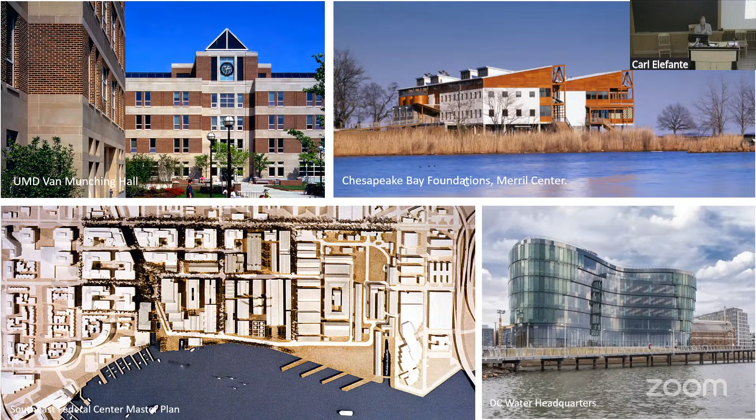And then Tom Eichbaum. He was one of the first graduates, I think in the first class of the University of Maryland School of Architecture, graduating in 1974. He then went on to get his master's degree at Harvard, but always his heart and the base of his architecture career was in Washington, D.C. He returned shortly after and became a partner in KCF with Tom in the mid 70s.

One of the things that most people who knew him well may know about Tom was that he was a really active model maker. He believed a lot in the physical qualities of a model and how important that was. That was a legacy he inherited from his father, who was the chief model maker for Louis Kahn. So he grew up learning a lot about great design and great modern architecture directly from one of the greats in Philadelphia.

Some of the projects he was well known for and very proud of was the University of Maryland Van Munching Hall. He was among the first trained architects from the University of Maryland who designed and built a building on campus. He was also very ahead of his time in sustainability and thinking about conservation and the environment.

He was instrumental in delivering the Chesapeake Bay Foundation Merrill Center, which was one of the first LEED Platinum buildings in the world. An example of the model here on the bottom is the Southeast Federal Center, which was instrumental in reshaping this southeast quadrant of Washington, D.C.

Now if you go down there, this is where Nationals Park is. A lot of great development that you've seen over the last 10, 15, 20 years was really tied back to this master plan that Tom was instrumentally involved in, which translated directly for Smith Group into one of our great projects that we're very proud of.

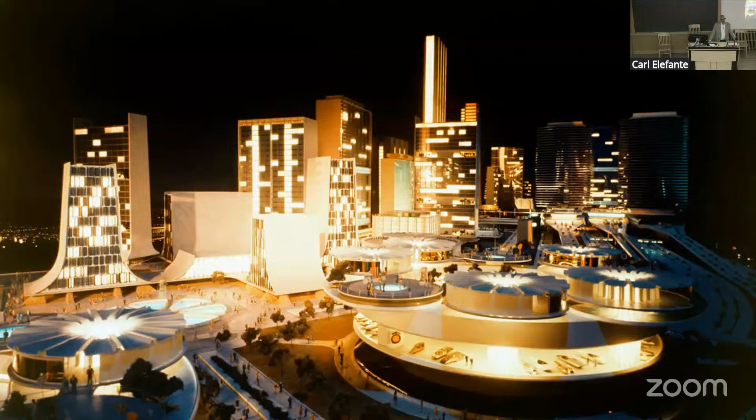I went to Pratt because in high school my chorus sang at the New Jersey Pavilion almost every month, and I got to run around this amazing 1964-1965 World's Fair, which was this vision of tomorrow that was just mind-boggling—this is actually an image from Futurama. I just wanted to go to architecture school and design the coolest things you ever saw. But the world I faced is what I just told you about, and there was obviously a bit of a collision between that reality and my image of buildings that were going to be so cool.

We actually have a president right now that wants to do this, put everything in gold. But it made me aware that we really do have this double personality, almost a schizophrenic personality, of wanting to design cool things, and yet everything we do has human purpose. And it's very hard for us to talk about the human purpose side of what we do. Why isn't that the first thing we talk about?

To some degree we do. We go and talk to our clients and we want to know if they have children and how many bedrooms they want, things like that. But sincerely, how many architecture firms have a purposeful mission that is a social mission in what they're doing? And I want to tell you, as AIA president, the answer is a lot of architecture firms. Smith Group is a great example, there are a lot of firms saying, yes, let's do work that is socially relevant.

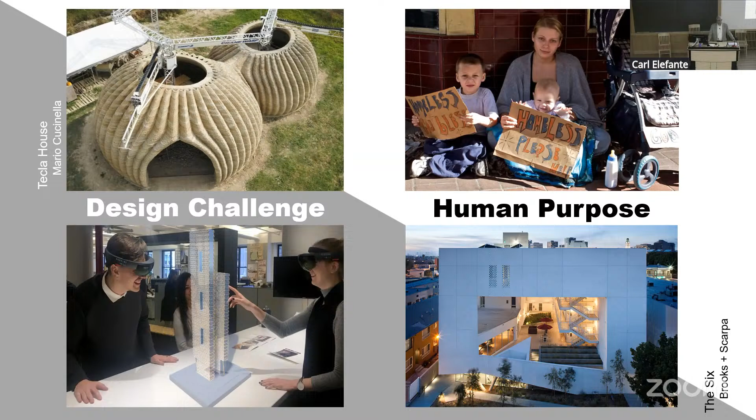No, they came together because New York was squalid. It was literally fatal to live in. New York in 1800 was 30,000 people. By 1860, it was 1 million. Can you imagine what that city looked like, going from 30,000 to 1 million in 2 generations? It was squalid, disease-ridden, absolutely a horrible place to be.

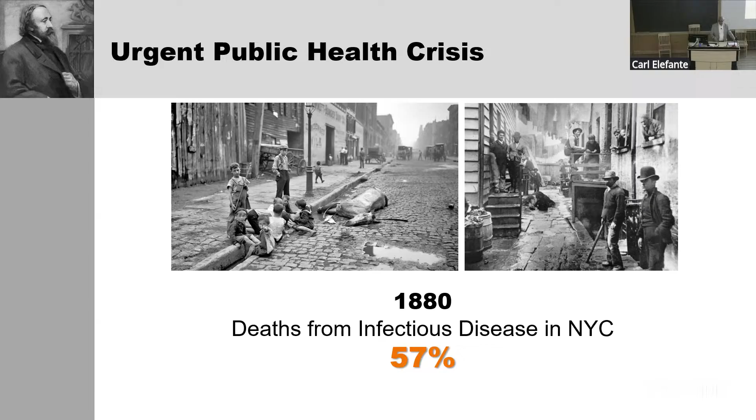And the architects of the day said, we have to do something about this. We have to be involved. We have to make our city a healthy, wonderful city. And what did they do? A lot of what happened was infrastructure. We need clean water, we need sewers, we need garbage collection, we need street sweeping. So there were a lot of very practical things that were done.

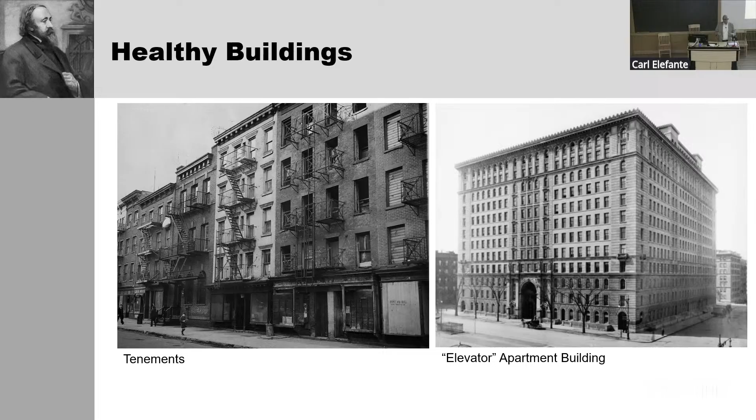But the other things that were done were literally architects saying we need a new generation of buildings. This has always been one I found particularly great, that we're going to go from tenements to elevator buildings. Elevator buildings gave them the opportunity to do taller buildings, and everybody would have light and air, and the rich people at the top would get really great views of Central Park and so on. But architects were very sincere about the importance of light and air in spaces, that we needed to create healthy buildings.

It brings us to the most important thing that I know of that's ever been said about architecture. And that is, first we shape our buildings, thereafter they shape us. Thank you, Winston Churchill. Let's simply remember that the conditions we create for human society are there for a long time, and they're going to shape human society for generations and generations. Are we thinking about that mission? Are we actually operationalizing that mission? Are we paying enough attention to that mission?

And I just want to say we have a contribution to make. Architects have sensibilities that matter. We have a sense of proportion about the world. We understand when things feel right and when they don't, when they are welcoming and when they're forbidding. We get that. We understand that vocabulary. Our world needs our contribution.

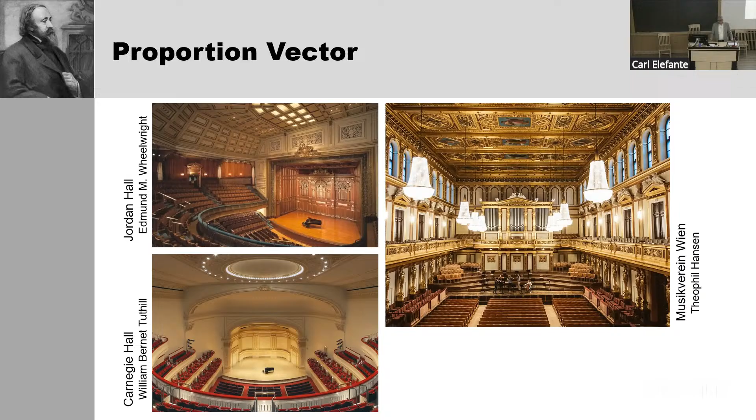Jordan Hall, Carnegie Hall, the Musikverein in Vienna. A generation later, the worst concert halls that have ever been built were built in the name of acoustic science. I got to renovate a bunch of them at the Kennedy Center. They were terrible.

Why? Because the modern science of acoustics had overridden all that tradition, and the science vector was the thing that everybody was supposed to pay attention to now.

So don't be intimidated by the science vector. Science has a role to play in what we do, but we as architects have something to bring to the table. Bring it to the table. It's of value. So where do we go from here?

We have some problems to solve, and I want to start with the climate imperative, because the climate imperative requires the following: we have to retool everything about what we do, we have to do it everywhere, and it will affect the lives of everyone. Everything, everywhere, everyone. That's a big job.

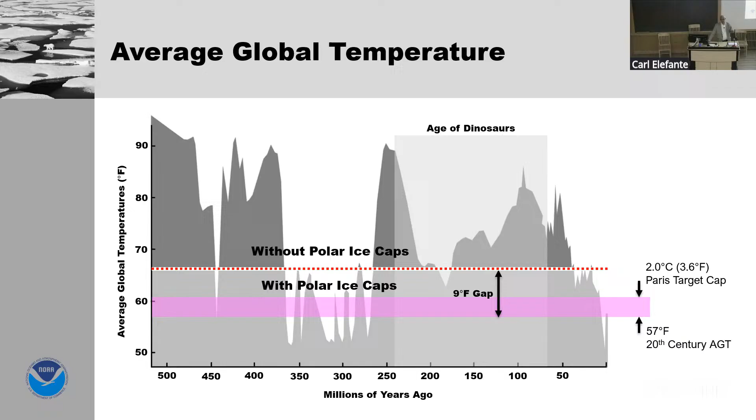The Paris Accord talked about this 2.0 degrees Celsius, and you can see that the gap closes about 40% to the iceless world. Going that 2 degrees is a big difference. It's not just 'oh, it's just 2 degrees' — it's going to catastrophe pretty significantly. Where are we today?

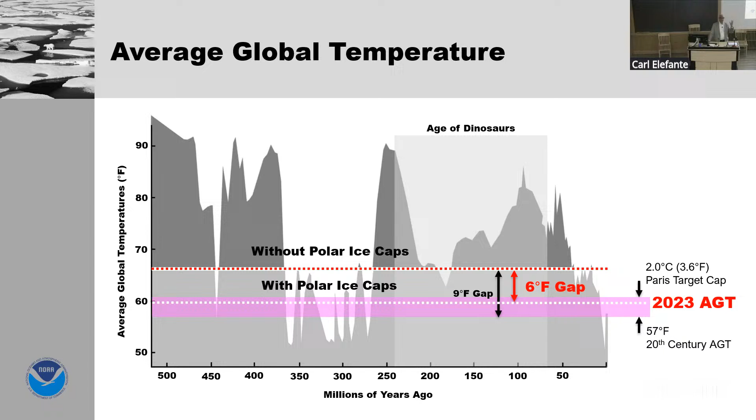We've gone a third of the way to catastrophe, and we're like, yeah, but that's so inconvenient. We don't really want to change anything. We have serious work to do.

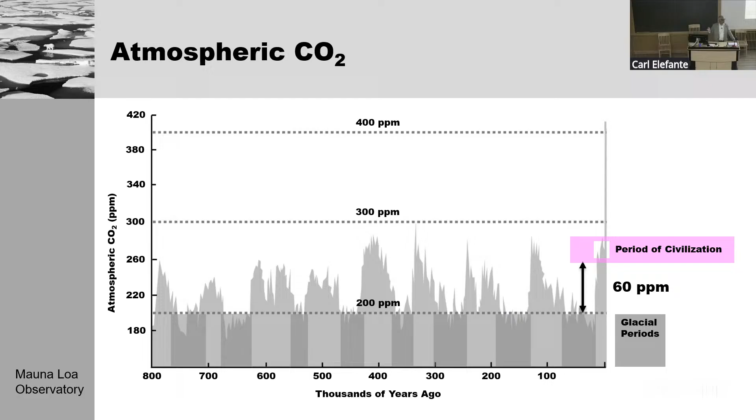Where are we? Our period of civilization was about 60 parts per million north of the ice age line. Today, where are we? We're more than double that amount from the temperate climate conditions that allowed civilization to exist. So we are playing with fire, literally, and we're way behind the curve.

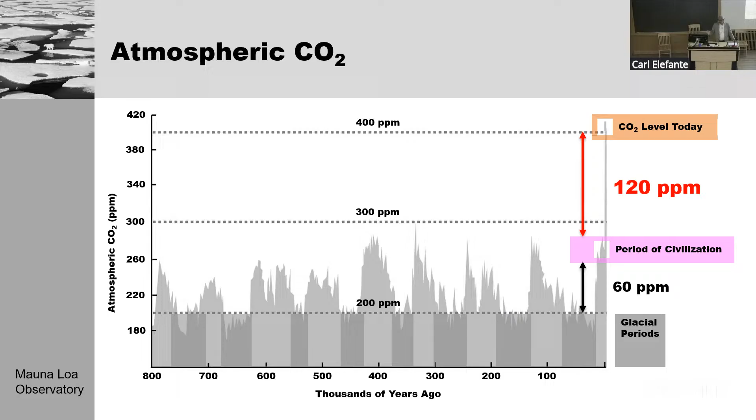So the building sector, us, what can we do? What are we doing? The Global Alliance for Buildings and Construction is the UN's semi-official organization created to talk about building sector issues and to measure things and really understand where we are. Every student in this room should know what Global ABC is, know what's in these reports. This is talking about what your job is in the future.

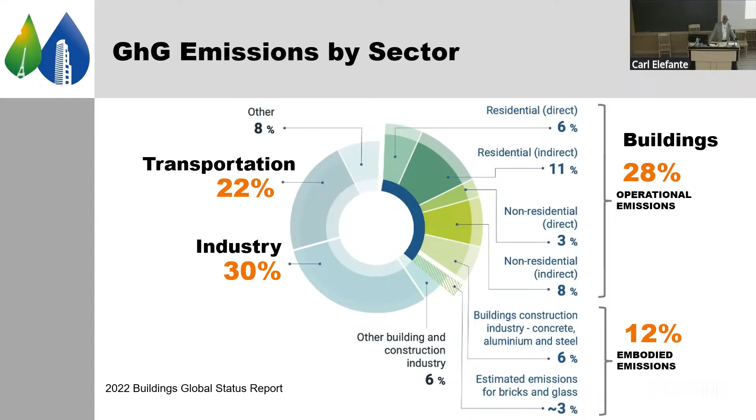What is it telling us? The first thing is that the building sector is a big contributor to the problem. In fact, if you take both the operational emissions and the embodied emissions associated with the building sector, we're the biggest part of the problem. I'll get into that in a little more detail.

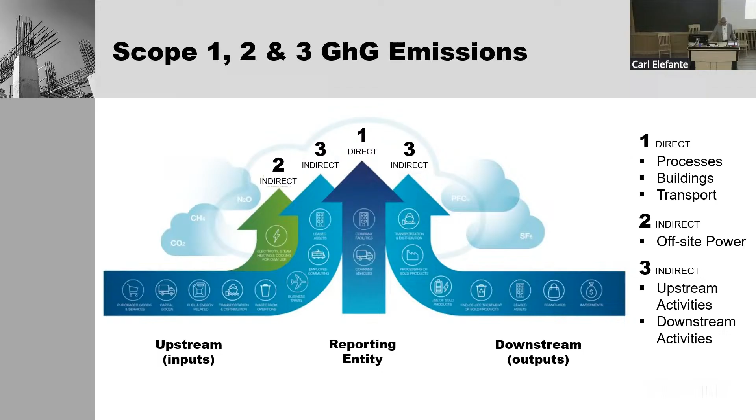What we're talking about with carbon pollution is what's called scope 1, 2, and 3 emissions. These terms were brought about in the industrial sector, made for products that were being shipped to customers to buy. The language doesn't really fit what we do very well, a bit of a misfit. So we've actually changed the definitions of scope 1, 2, and 3.

Scope 1 is still clearly the same: it's what's happening in your building. Are you consuming fossil fuels in your building, and what are you consuming for? Most of the carbon pollution is coming from fossil fuel consumption. If you have an all-electric building, the answer is none. There are no direct emissions in your building.

Scope 2 is indirect emissions of a certain category, the energy you're consuming for your operations. What is that energy? Today in the United States, about two-thirds of that energy is produced by carbon polluting sources: coal, natural gas, and a little bit of oil. So in most places in the US, you're polluting just by turning on the switch. You're also polluting by plugging in your car, I might add, and I'll come back to that in a minute.

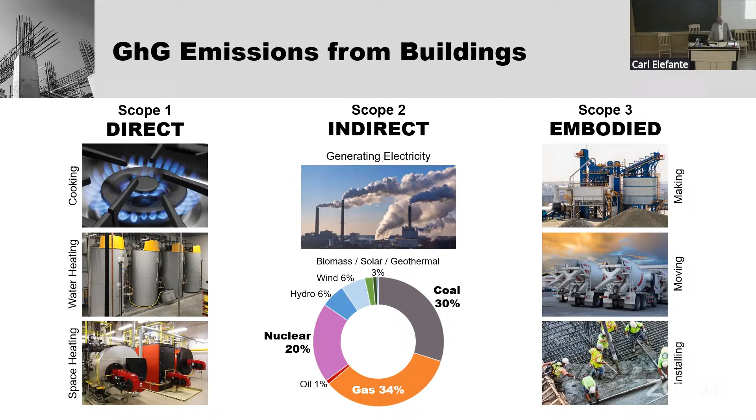The third is what we call embodied emissions. Lloyd Alter talks about how wrong this term is, and he's right. The carbon isn't actually in those materials we made our buildings out of. It's already been polluted into the atmosphere by making those materials. So in that sense it's embodied in the materials, but it's not really in there. It's associated with the making of the building and the making of the materials the building's made out of. So that's it, those are the 3 things we have to track.

What do we have to do? We have to do these 5 things. The first one is easy: stop using fossil fuels in your building. Everything about how buildings are operated has an electric version of it, which is practical, in the market, and many of them far better products. All-electric buildings are not a threat to your clients and occupants, it's just a better way of doing business.

The other 4 things we need to do take a little more work: envelope performance, systems efficiency, embodied greenhouse gases in the materials we're using, and of course the incorporation of renewable energy.

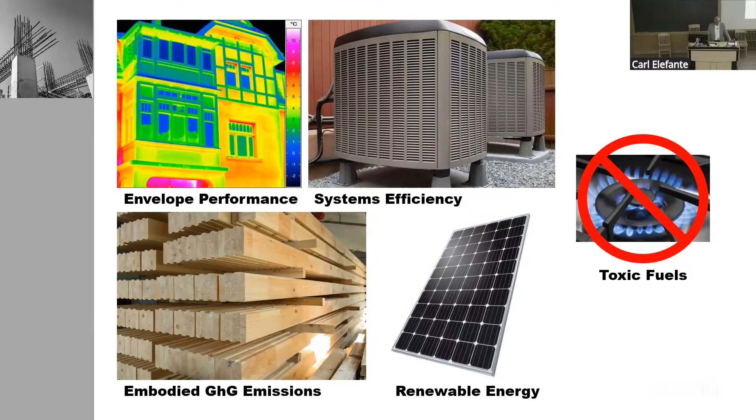I'm not going to get into these in any detail, but in thinking about your buildings, what are you thinking about in terms of envelope performance? I'll just say this doesn't mean every building needs to be passive house. I'm actually in a world where, some other time, I'll spend an hour telling you why passive house is not the solution. Not today.

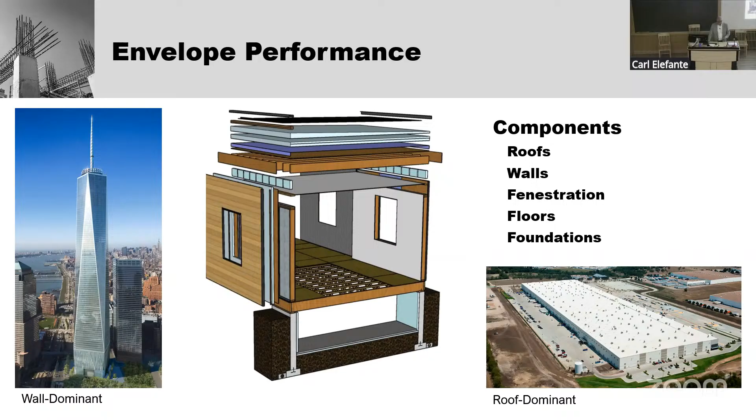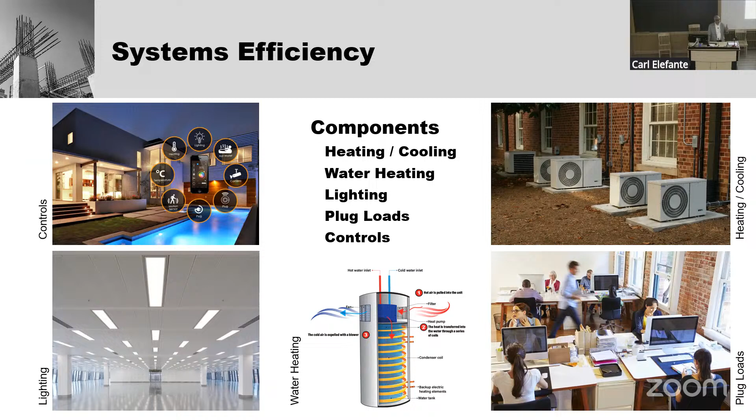Systems efficiency: what are we doing to make our energy use come last instead of coming first? That was the language in 1973 - how do we not use energy was what everybody was trying to do. How do we not pollute carbon needs to be our mantra now.

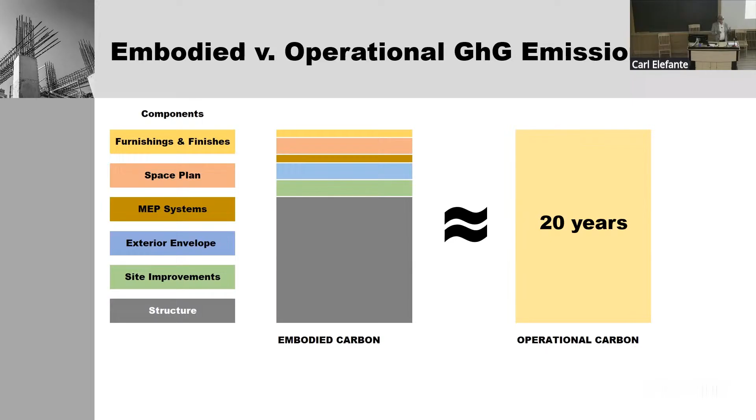With embodied emissions, one thing a lot of people struggle with is that this is actually big - the embodied emissions in a typical building are at least about 20 years worth of operational emissions. As we get our buildings more energy efficient and bring carbon emissions to zero, the only issue becomes embodied emissions. So we need to pay way more attention to embodied emissions than we are now.

And of course, we have choices of what materials we use, and the embodied emission footprint of them really varies quite a lot. That's another thing I could talk about for an hour, but we're not going to do it today.

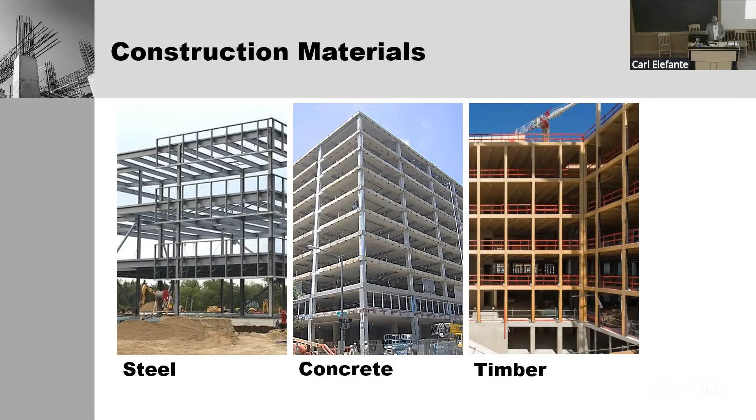I'm happy to say that the American Institute of Architects renovated headquarters building includes building integrated photovoltaics as part of the shading system of the building. It can be done.

The bottom line: our codes today are pretty good. Build to code, maybe even build a little better to code. Electrify your buildings, put renewables in your buildings every way you can. And then let's start to talk about zeroing out embodied carbon, because that's the real challenge for us. So we can do this - that's doable. I haven't talked about anything that we can't do or isn't being done.

I said at the start, though, that we need to really be doing a mode shift. And the way I like to talk about the mode shift is that we need to be thinking beyond modern. What do I mean by that? I'm going to spend a minute talking about that.

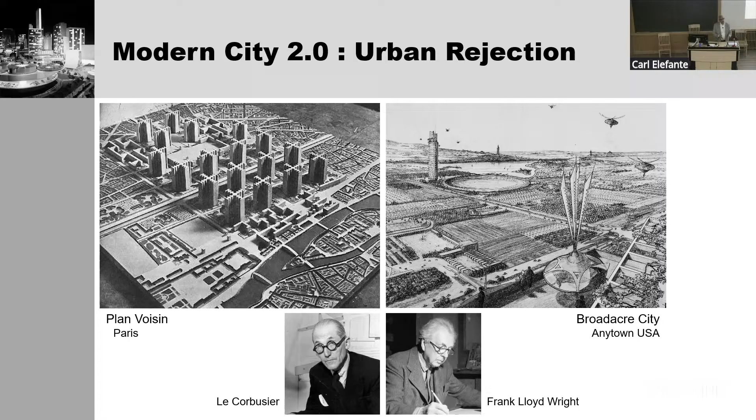Corbu literally wanted to bulldoze the first and second arrondissements and build 60-story towers. And Frank Lloyd Wright wanted us to fly around in little space cars, right here in this picture, and live in Broadacre City, saying that suburbanization is obviously the solution. So these were not urban reformers. They were urban rejectionists. Where are we today?

The two smartest cities in the world that look in the mirror and go, oh man, am I smart? I'm New York, I am smart. I'm Paris. These two cities, this is what they're going to do: visions of sugar plums. New York City is going to tear down 50-story buildings and build 100-story buildings. And Paris is going to build these things that have windmills in them or whatever. At least Vincent Callebaut is thinking maybe the only solution is not a glass building.

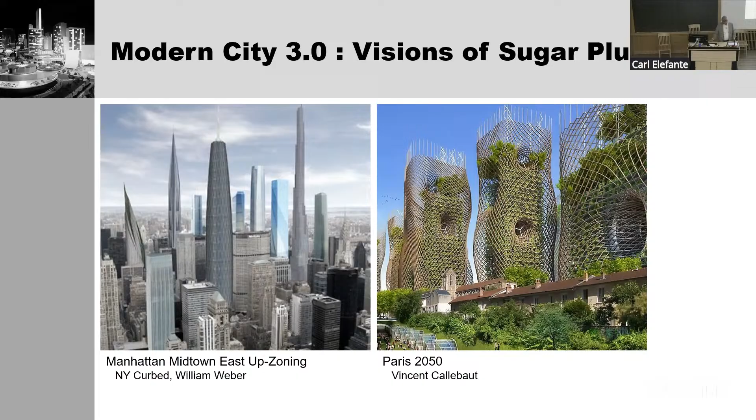But seriously, this is the future. This is modern era bias, so dense that we will never get anywhere until we kick the can right off the sidewalk. We know what it means to build cities for people. We also know what it means to build cities for banks so they can maximize their return. Which one is it? Which one are we going to pay attention to? Which one are we going to become part of?

So I just have to throw this in: Executive Order 14344. I talked about beyond modern. There are people talking about beyond modern around the world today. Some of them are talking about it in a way that I'm not particularly in agreement with. Are we going to become part of this conversation? Or are we just going to say, oh, those are those stupid people, so we're not going to pay attention to it?

What is our narrative that's more compelling than this narrative? I mean, read 14344. The narrative in it is very compelling. Okay, you don't have to agree with what it's saying the architectural solution is, but what's our narrative that's more compelling than this?

So I want to give you a little bit of that narrative from my world, and that is having, mid-career, become a historic preservation architect. That gave me the opportunity to do two things. One is I got to actually work in older buildings. I went into that as the director of sustainability for Quinn Evans. I was going to green those bad old buildings. And after about 10 years or so, I started going, which one's the bad building again?

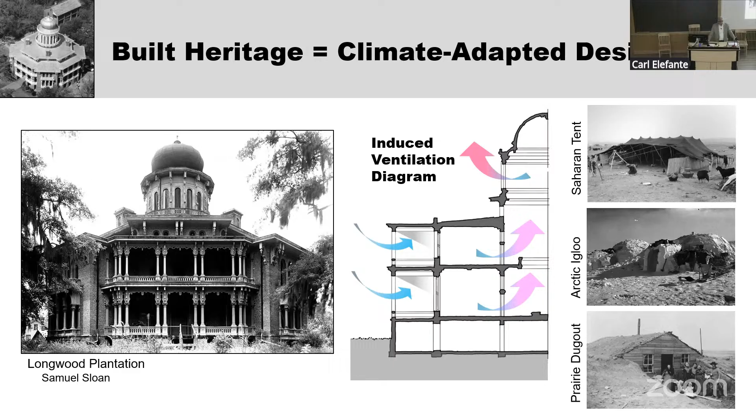Fortunately, there are architects understanding this. This is a building right here in Washington, D.C. by Rick Schneider and iStudio, where they did field investigation of the historic school and noticed that all the classrooms had shafts that went up to the attic. Why have a shaft that goes up to the attic? The boiler's in the basement. They discovered that in the attic there was a cupola, and the cupola was drawing air out of the attic. It was an induced ventilation system literally pulling air in through the classrooms, out through the attic, and out through the cupola. So what did they do? They emulated it in their design and created these solar chimneys. They also shaded the building according to the orientation of the wall. So we can do this.

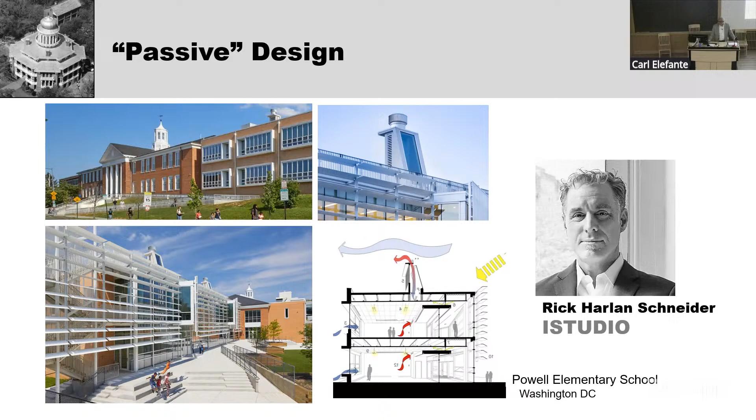Just want to say one more thing, and that is our ideas of how we're designing for climate now - our use of psychrometric charts and so on. This is the work of the Olgyay brothers. They taught at Princeton for many years. They had 5 factors they considered in trying to determine human comfort. Our psychrometric charts have 2: temperature and humidity, that's it. We don't even have radiation, which is the number one way our body gains or loses heat.

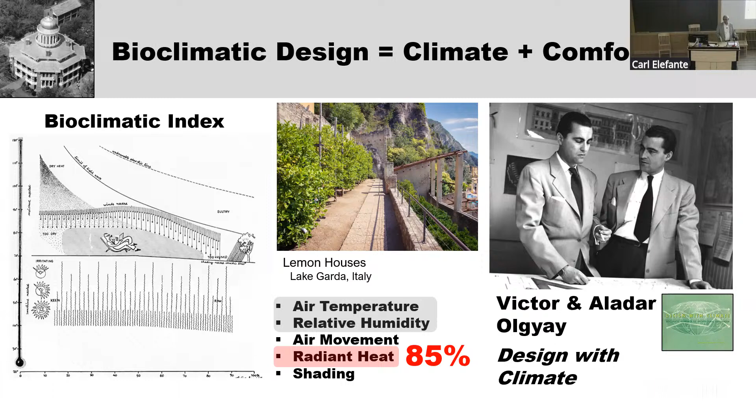So again, back to the science of Kennedy Center and Lincoln Center - how good is the science we're using to design our buildings around? It's like, okay, we're going to have one temperature on one thermostat, and operate the building 365 days a year on that. That is ridiculous. That's lazy and stupid. We can do better than lazy and stupid. I really recommend you look up the work of Susan Roaf and others who contribute to adaptive thermal comfort, and the Comfort at the Extremes conference.

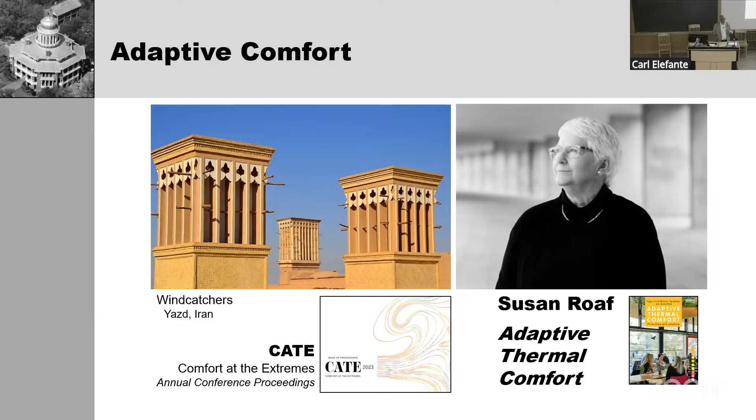This is the wind catchers in Yazd, Iran. People lived there for thousands of years without air conditioning. How did they do it? Let's figure it out.

The second thing I want to talk about is the Carl statement: the greenest building is one that's already built, and our tendency to devalue buildings very quickly and massively. I don't actually know how to do anything, I just know how to wave my hands around and talk about it. But the people who actually do know how to do something did a study of that statement and found that keeping existing buildings is provably environmentally a better way to go, by far, most of the time.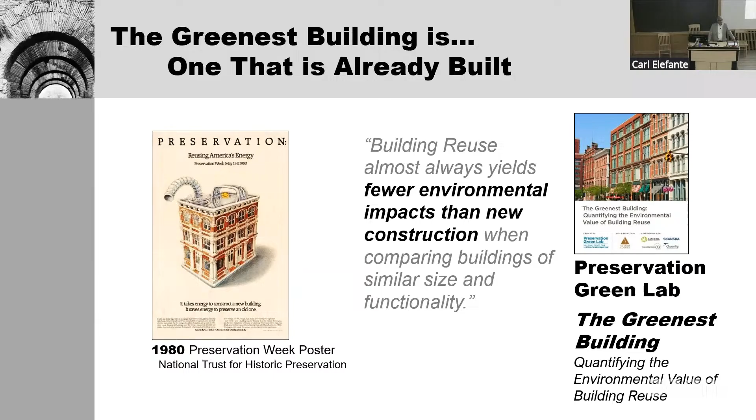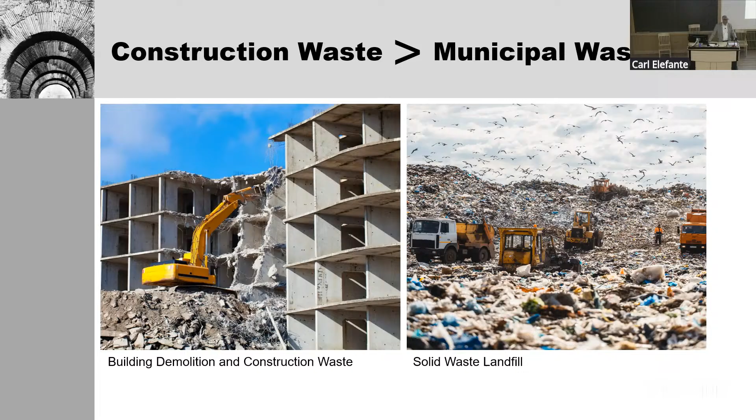The landfill in the United States is only half by tonnage of construction and demolition waste. Let me say that the other way around: construction and demolition by tonnage is twice what all the municipal waste in this country is annually. We throw out 800,000 buildings a year. It's wastefulness on a scale that's criminal, just criminal. Fortunately, we're beginning to understand that building reuse is in fact design. And I love Liliane Wong's work because it starts with obsolescence.

It starts with saying we have to rescue the buildings that we now understand are obsolete. The power plant that's not being used anymore, the shopping mall that's not being used anymore, the empty office buildings in Washington D.C. that aren't being used anymore. So it starts with this sense of obsolescence.

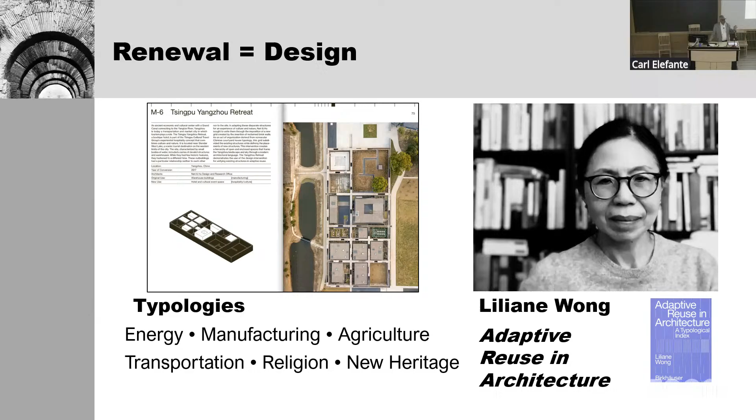Then what are the reuse challenges? What are the reuse opportunities? We're beginning to actually see this get into the covers of magazines and things like the Pritzker Prize. So I'm encouraged that we're beginning to understand that.

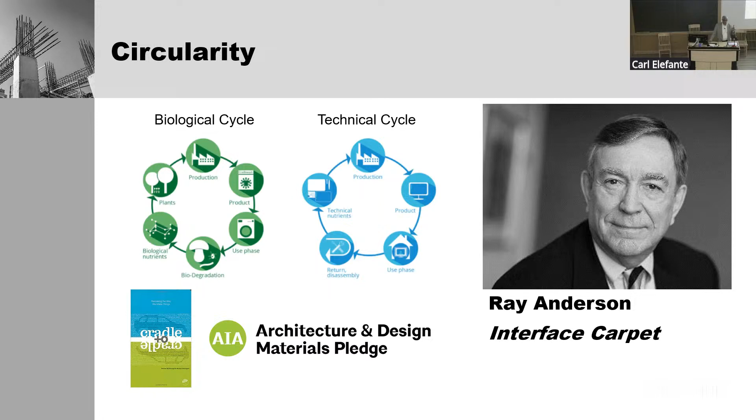I do want to pop a little bit of a balloon into a lot of the things we talk about with things like circularity, which again are industrial level ideas that have quite a bit of validity in some industrial level stuff. Even I have to say I think technical cycle is a bit of a misnomer, and it only really works with one category of materials: minerals. But what are we building our buildings out of? What is our definition of good technology today?

I just want to use the example of two New York City icons: the 20th century icon, the Empire State Building, and the 21st century icon, the Freedom Tower at the World Trade Center site. The Empire State Building and Freedom Tower are both LEED Gold buildings.

When the Empire State Building was renovated about 15 years ago, the windows were popped out. They're all the same size. They were taken to an empty floor in the building, reconditioned, and put back in. The other two-thirds of the building is made out of a material called stone. You may have heard of it. And what they had to do to restore that material was, wait for it, they had to wash it.

And the only reason they had to wash it was because they didn't think it was patina. Patina is what we call dirt that we like. Okay? So that's what had to be done to make that wall renewed for another generation.

So what will be the case when Freedom Tower is ready for its whole building renovation that the Empire State Building just went through? The entire facade is going to be disassembled and thrown into the landfill because it's not recyclable. It can't be disassembled and reused. None of the components are reusable in any way, shape, or form.

You read about the recycling of the glass and so on. There are some things like, oh yeah, we can crush the glass up and use it as an aggregate in concrete. That is not recycling, that's downcycling—taking a highly valuable material and making it junk and saying that we've reused it. So which one of these is a more sustainable way of building?

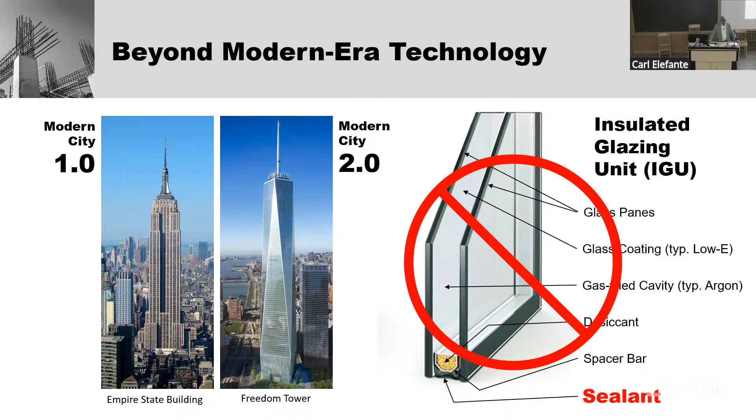Is our 21st century example really better than the 20th century example? It is not. This is not sustainable technology. We need to understand building life cycle.

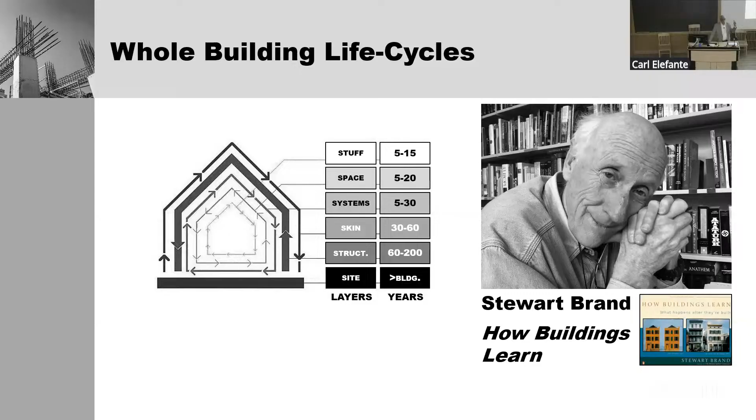Thank you to Stewart Brand—I hope that every student in this room reads his book, How Buildings Learn. But from the carbon standpoint, the reason why this is so important is that there's a real coincidence between heavy construction and carbon footprint.

So two-thirds of our buildings roughly are made out of these enormously heavy industrial materials, steel and concrete particularly, that literally last forever. They last forever if we just simply use them well. And again, we just throw this carbon out like there's no tomorrow.

And I'll just say one more thing: our building codes tell us that we have to build these very, very durable buildings. They have to be fireproof, earthquake proof, storm proof, bomb proof. And yet there's not a word in the code that says, since you're building a building with a structural frame that will last for 500 years, here are our guidelines for how to make that an investment that will have value for 500 years.

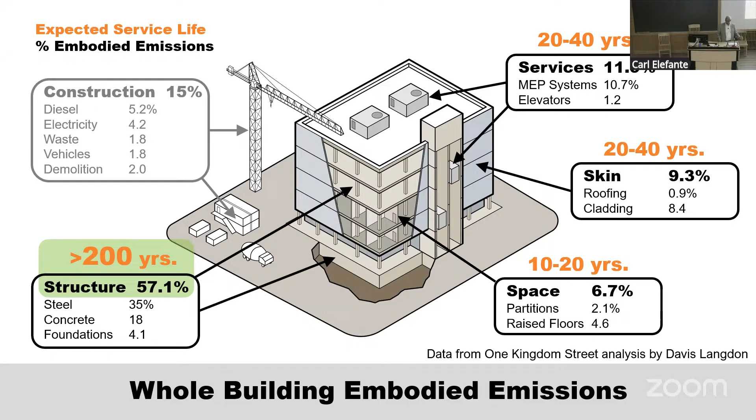We build buildings that are so weird that no one can reuse them, instead of buildings that are so ordinary that anybody could reuse them. And our codes could talk about that.

They put up new curtain wall and everything. Oh my gosh, what a wasteful thing to do, blah, blah, blah. Believe it or not, I'm here to defend this, because they kept something.

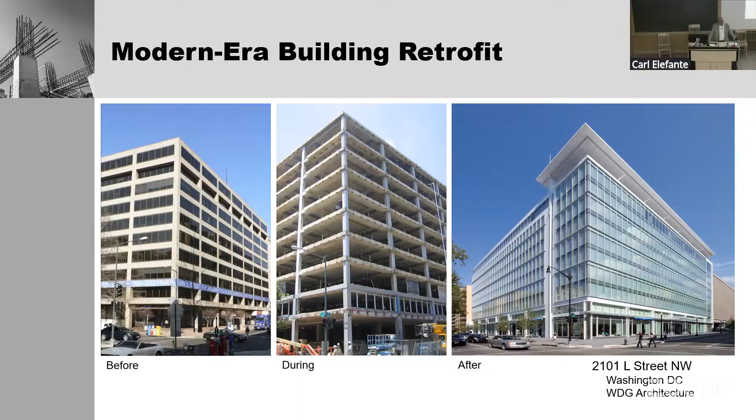They kept the frame. They kept 60% of the carbon pollution of this building. Let me give you the real nuts and bolts on what this looks like.

Here's a project we did in Detroit that's similar. Here's the carbon footprint of the skin: 368 tons for the stuff we needed to do to make it go from an office building to apartments, another 920 tons. And then we kept the structural frame, valued at 1,932 tons.

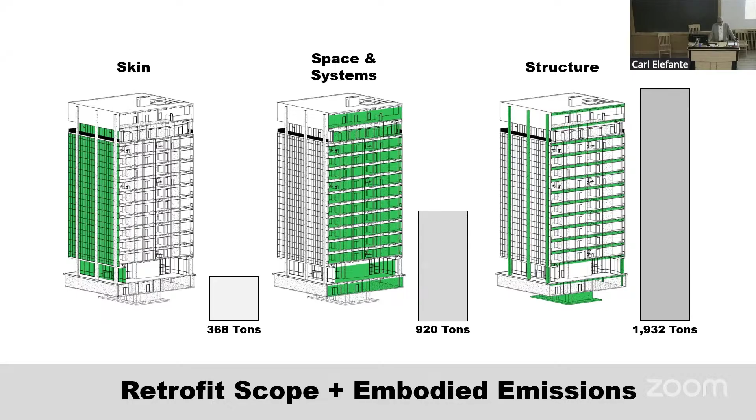So what does that look like from a holistic carbon footprint viewpoint? Well, the first thing is, what are we comparing it to? What's the baseline? The baseline is the building that was there, belching out carbon before. So we're going to do something to improve that, right? That's what we do as architects.

So what do we do? We spend a little embodied carbon on the skin. We spend a little more on the space plan to make it apartments instead of office. And then we start consuming energy and polluting carbon less because we now have a better building. So we actually get a net avoided emissions result from doing that work.

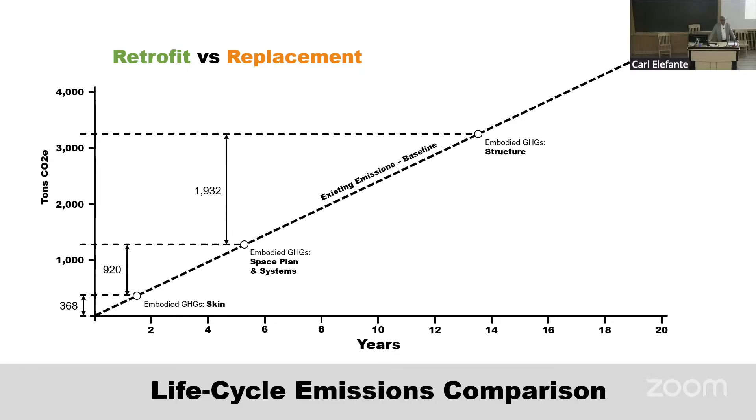Now, what happens if we tear that building down and replace it with a new building? Well, we have to buy that structure. Now what happens when we start consuming operational emissions? How much have we saved? We've saved nothing. Now I have a test question for you: which one of those is the better one? We just have to understand the facts, the actual outcome of what we're doing.

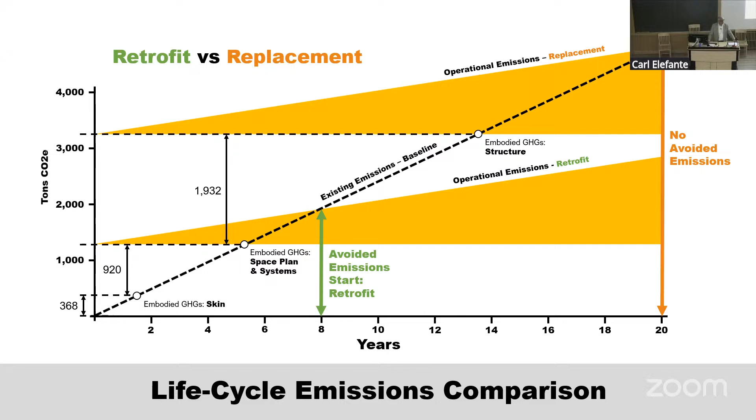There is plenty of design opportunity here. These are just three of my favorite examples: Lever House, which is a restored historic building; the Celebrezze building, where they literally reclad the building with a second facade; and the Green Wyatt Federal building, where they replaced the facade like I showed you on those previous buildings.

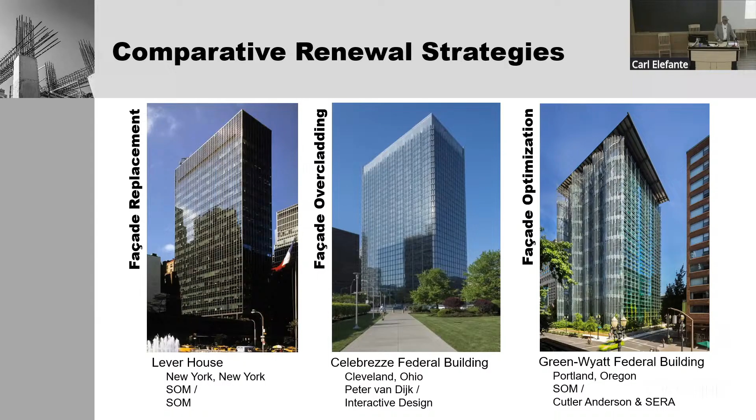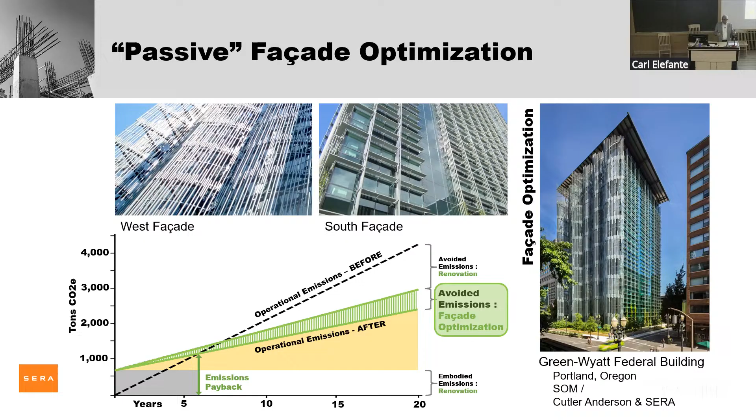But here's what they did, wait for this one. They designed the facade to respond to its solar orientation. I know that's a difficult concept, I'll say it again: they designed the facade for its solar orientation. As a result, about a third of the carbon reduction was a result of that facade design. Almost no cost, just a different facade design, reducing the load the building has to deal with.

Why is this important? It's important because most of what you are going to do, students in the room, is deal with the post-World War II building stock. You are going to make more fee renovating those buildings than designing new ones. That's a reality. I hope that doesn't shatter you too much, but that's what's happening with real estate economics.

The other part of that: don't believe the bunk you hear about growth. Our population is flat, it's been flat for 30 years. The only thing that has made our population grow in the United States for the last 30 years is immigration, which we now don't allow. So our population is flat. Why do we need to double the building stock in the next 30 or 40 years? We just don't.

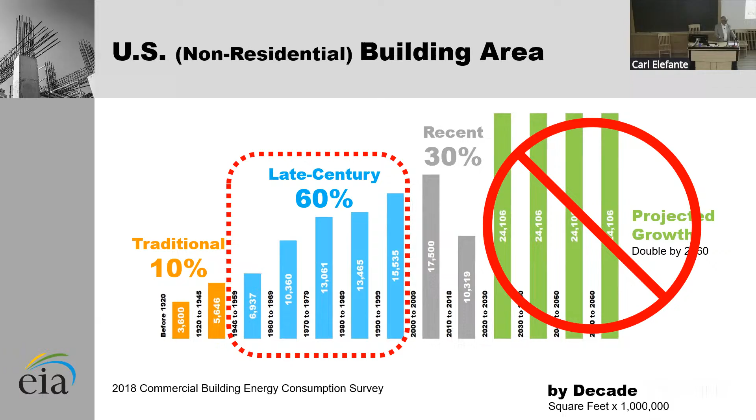When I was born, the typical house was 900 square feet, and the typical family was 3.9 people. Today, the typical house is 2,400 square feet, and the typical family is 2.3 people. So we have a whole person less, and three times more house. So why would we need to double the building stock in the next 40 years? Will somebody please explain that to me? I'm missing it. Let's use the buildings we have, for heaven's sake.

Permanence, architecture's superpower. If I learned anything from dealing with old buildings, this is the number one lesson: buildings last, wait for it, forever. Measured in human lives, they last forever. They last for thousands of years. Not even Methuselah lasted for 1,000 years.

Jane Jacobs understood this in terms of the economics of affordability, and that affordability and older buildings are totally joined at the hip. The idea of building affordable housing is an oxymoron.

The reality of what it means to renovate versus what it means to build new: highly crafted people need to do work that requires real skill sets to renovate an existing building. The money goes to their paychecks, it stays in the community. The amount of energy consumed is way lower, the amount of materials consumed is way lower. Building reuse and renewal is by far a better way to go, and we have the greenest building study to prove it.

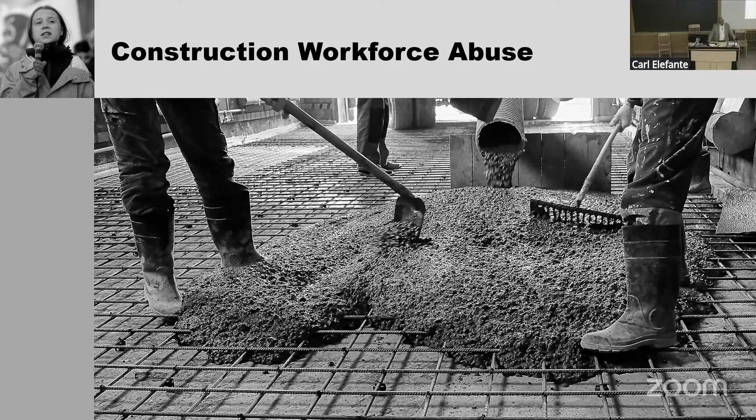Same thing with understanding our role, our agency in construction workforce. Construction workforce abuse is not a theory, it happens even in this country. A lot of this has been associated with undocumented workforce issues. But because of that, all of the construction associations have for 30 years been asking Congress for a sensible, workable immigration law system, and we haven't done anything about it. So obviously the right solution is just throw them all out, throw the rascals out.

I really hope you look at the work Sharon Prince is doing at Grace Farms and understand that our global supply chains are dirty. There's not a global supply chain in the world that isn't dirty, that doesn't have forced labor, child labor, and even human trafficking behind it. The most common everyday things—the worst one of all is timber. If you're using a special timber like mahogany, chances are there were children standing at gunpoint involved in harvesting those materials. Look at the work of Grace Farms. We should be paying attention to this.

I want to end by saying, how come we're so bad talking about the great stuff we do? I got to meet Carlos Moreno last year—he's awesome, I love him, I just threw my arms around him, he's such a fantastic guy. His book, he so totally gets it. Why is it called The 15-Minute City? What the hell is that? Does anybody care what a 15-minute city is? His actual book is called Living Together in Harmony. Why can't we talk about living together in harmony? Why do we have to talk about 15-minute cities? Come on, folks, let's talk about something that sounds like it matters.